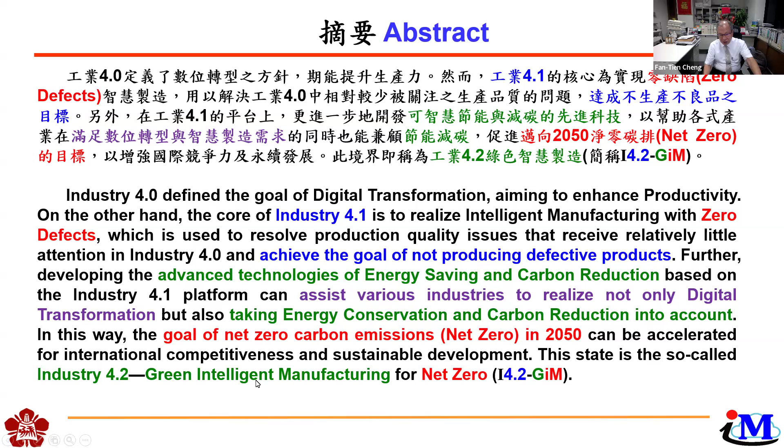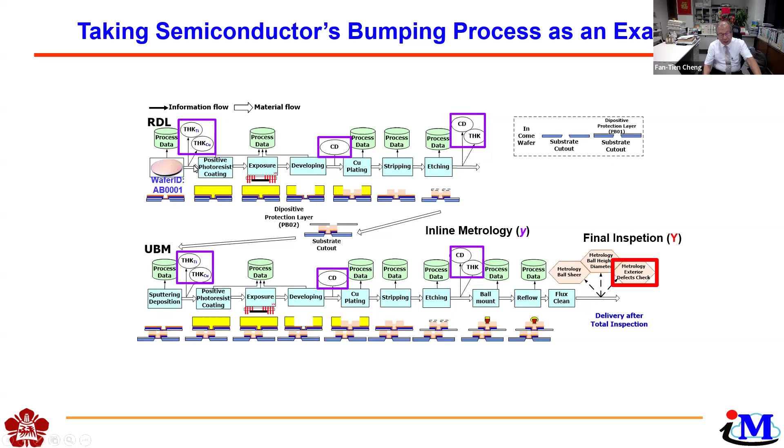Allow me to take the semiconductor bumping process as an example. To begin with, we need to collect all the big data. This includes the final inspection data, inline metrology data, the routing data, and finally all the manufacturing process data, that is from the FDC.

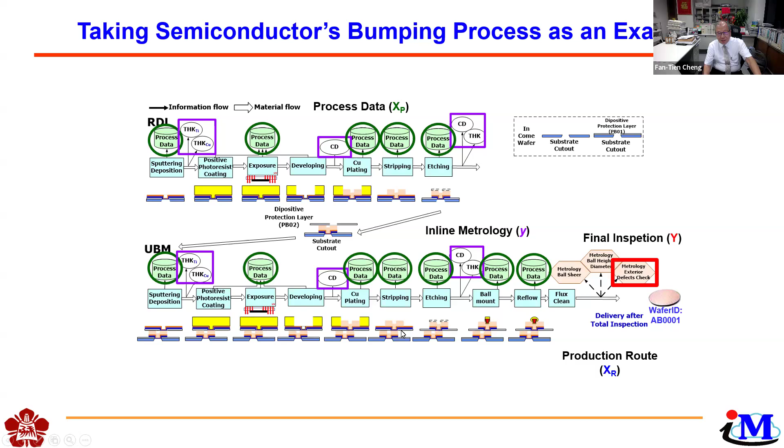Let me use the semiconductor bumping process as an example. After the production line big data is prepared, we need to install IoT devices, which I call CPAs, to collect not only the process data, but also metrology data and inspection data.

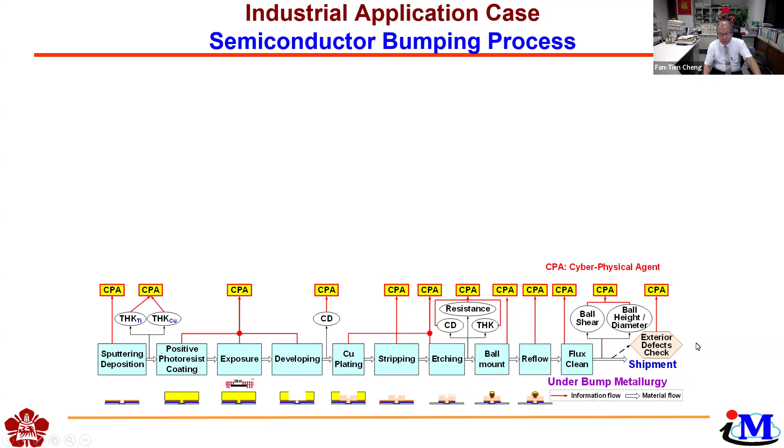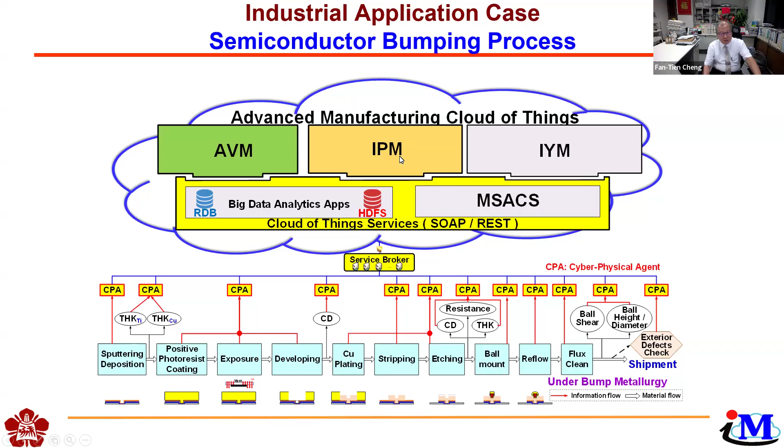After collecting all the big data, we transfer it into the cloud. We need to build a cloud here, based on the Advanced Manufacturing Cloud of Things framework. With this framework, we can install various intelligent services, such as automatic virtual metrology (AVM), intelligent predictive maintenance (IPM), and intelligent yield management (IYM).

Allow me to tell you the importance of product quality and the implementation of Industry 4.1. Let me use a video to show the importance of Industry 4.1.

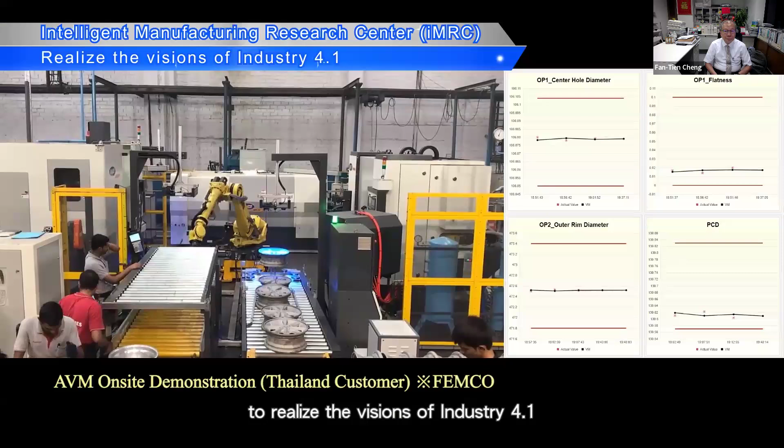Professor Fan-Tien Cheng and team at the Institute of Manufacturing Information and Systems of NCKU established iMRC in early 2018 to align with the Higher Education Sprout Project from the Ministry of Education. The mission of iMRC is to assist various manufacturing industries to realize the visions of Industry 4.1 and to achieve the goal of nearly zero defects of all products.

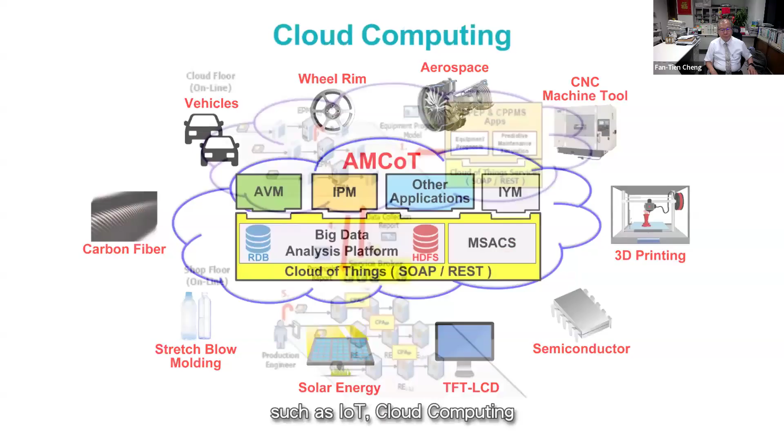Despite achieving the four core technologies of Industry 4.0, such as IoT, cloud computing, cyber physical systems, and big data analytics, I am able to use AVM technology to make all manufactured products undergo total inspection, not just to care about the health status of the equipment. What we need to care about is whether the product itself is defective or not. If we can find out the defective product, we will reject it, therefore all deliverables are without defect. So the mission of iMRC is not only to exceed Industry 4.0, but also to achieve the goal of zero defects.

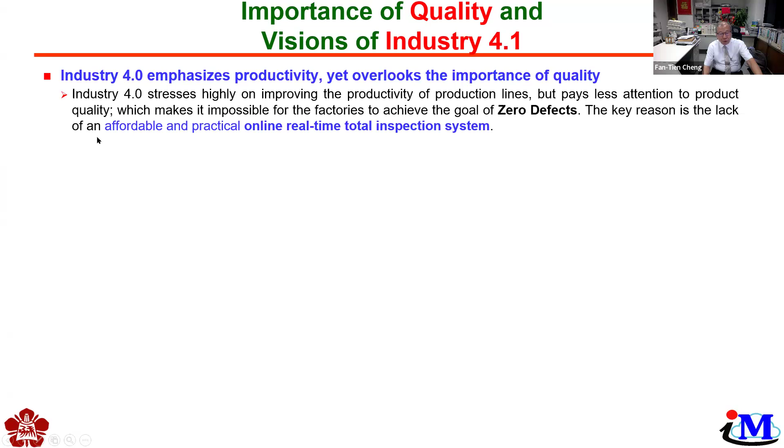Now the importance of quality and the visions of Industry 4.1. Industry 4.0 emphasizes productivity, yet overlooks the importance of quality. Why? The key reason is the lack of an affordable and practical online real-time total inspection system.

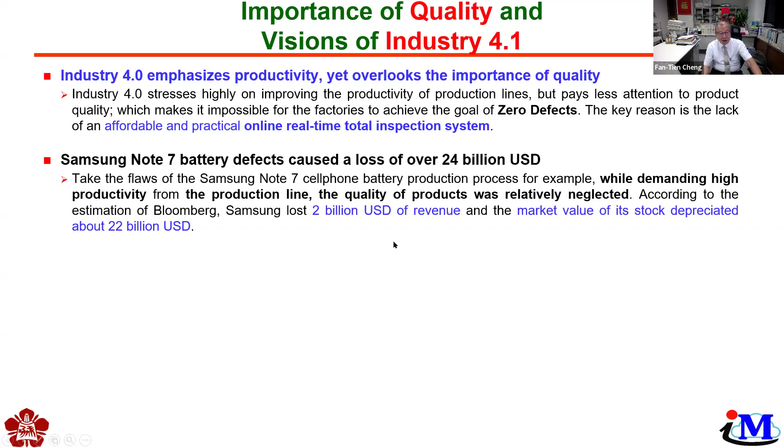For example, Samsung Note 7 battery defects caused a loss of over 24 billion US dollars. What the customer really cares about is that what they purchase has no defect. If there is a defect, they need to get it fixed or exchanged. Then it's no good.

For example, for the automobile industry, what they emphasize is zero defect manufacturing. In order to address these zero defect issues, we need zero defects production, and that is the vision of Industry 4.1. In other words, it's important not to overlook product quality while pursuing productivity.

So by integrating the intelligent services such as AVM, IPM, and IYM into the advanced manufacturing cloud of things platform, the goal of zero defects can be achieved. And this is the so-called Industry 4.1.

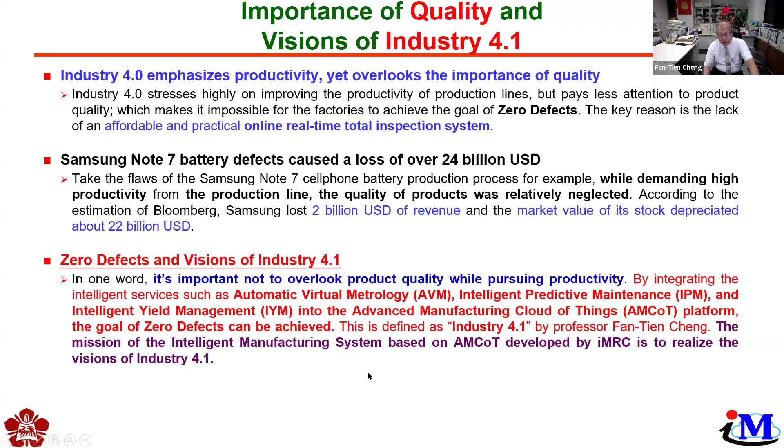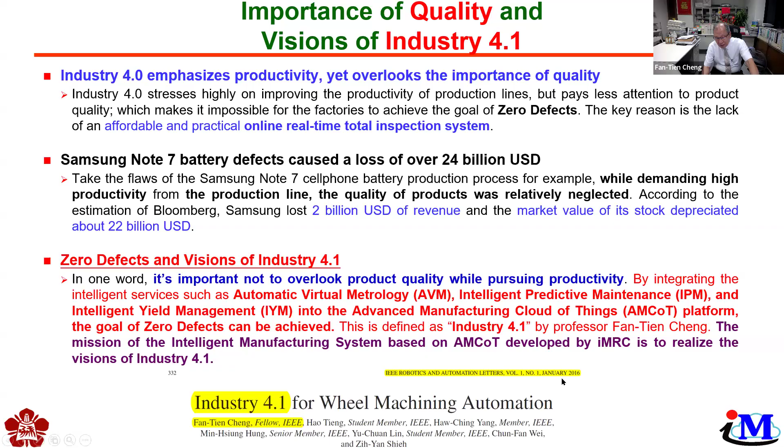In fact, the concept of Industry 4.1 for zero defect manufacturing was published in IEEE RA-L in 2016. So in order to implement Industry 4.1, I need to develop the so-called intelligent factory automation system platform. In order to achieve the above mentioned goals, it's necessary to create this. This is a total solution for intelligent factories.

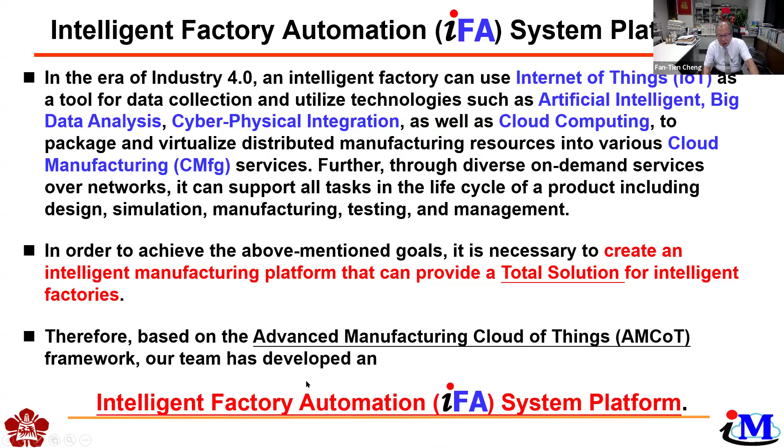So based on the advanced manufacturing cloud of things framework, our team has developed an intelligent factory automation, the IFA system platform. In applying this IFA for Industry 4.1 to achieve zero defects, the enabling device is an IoT device called CPA.

The CPA should have the functions of data collection with the equipment drivers, which will have interface communications such as OPC UA and SECS/GEM. And of course, it should have edge computing capability with the pluggable application modules, and it provides the functions of synchronizing with cloud services with this communication module.

So with these CPAs, we can connect the shop floor. The digital transformation: connect the shop floor and send the data into the servers that install AVM, IPM, and IYM, and it will interface with the MES and ERP. So this is the IFA platform.

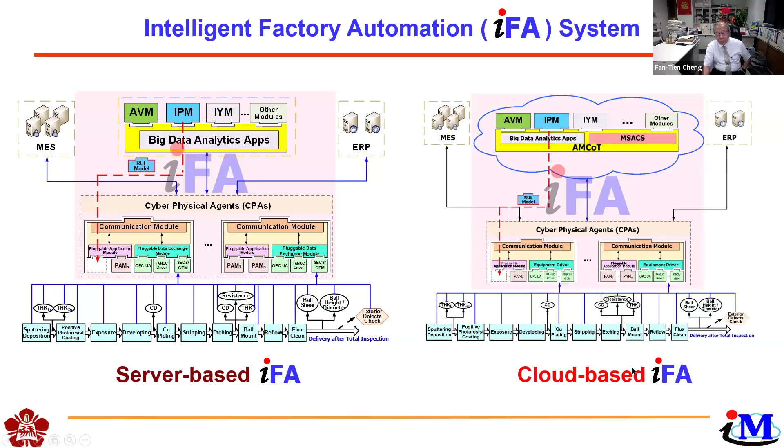So for Industry 4.0, we will have cloud computing or cloud manufacturing services. Then in this version, the cloud-based IFA, I just put these servers into the cloud. So this is the concept of the IFA platform. Now, an introduction to cloud-based IFA, and I'll use the video to show how the IFA operates.

By integrating technologies such as cyber physical agents, CPA, advanced manufacturing cloud of things, AMCoT, automatic virtual metrology, AVM, intelligent predictive maintenance, IPM, and intelligent yield management, IYM, iMRC developed the Intelligent Factory Automation, IFA system, as the core to upgrade Industry 4.0 to Industry 4.1 for realizing the goal of zero defects of all products.

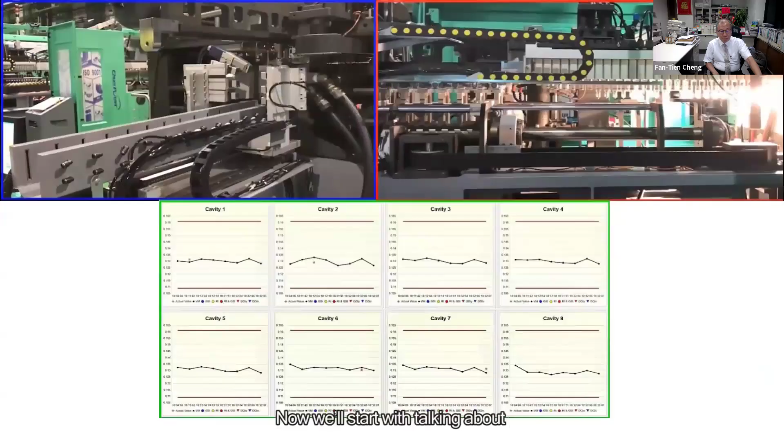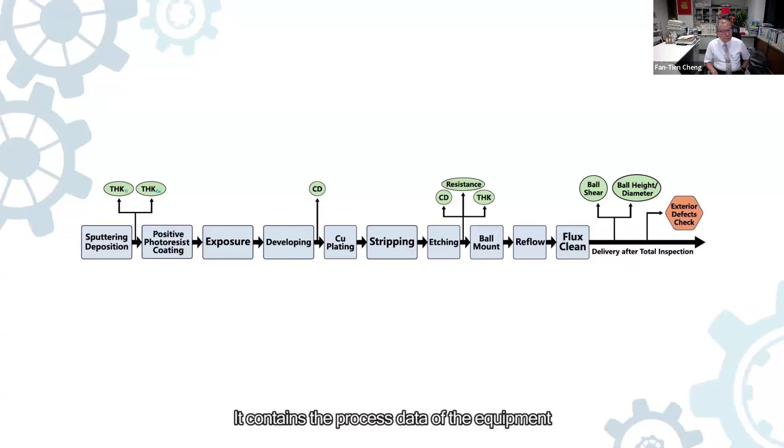Now we'll start talking about the operation flow of the cloud-based IFA system. Let's take a semiconductor factory which is ready to implement IFA, for example. Here we can see the manufacturing process of it. It contains the process data of the equipment during production and metrology data during inspection. On the left, we have the existing MES system and the ERP system on the right. The block marked with background color is our IFA system. All the components contained in IFA will be described as follows.

First, we have to install CPA. It will collect process data, metrology data, and other data from the ERP and MES systems and upload them onto the IoT application platform, which is supported by Chunghwa Telecom. As CPA is a significant part of the whole system framework, we'll talk more about it.

CPA is a cyber physical integration agent component based on the technologies of Internet of Things, IoT. It is in charge of collecting the data of different machineries. CPA is equipped with different equipment drivers for various industries, such as SECS/GEM and Interface A for the semiconductor industry, OPC UA and MTConnect for the machine tool industry, etc., and communication services for connecting to the internet and the cloud. Various intelligence services can be implemented as pluggable application modules and plugged into CPA for edge computing.

Based on the IoT application platform, we construct our AMCoT, which includes big data analytics apps and the manufacturing services automated construction scheme, MSACS. Next, we'll explain the core intelligence services in the AMCoT framework. The first one is automatic virtual metrology, AVM. The main function of AVM is to convert offline sampling inspection with metrology delay into online and real-time total inspection of all the work pieces.

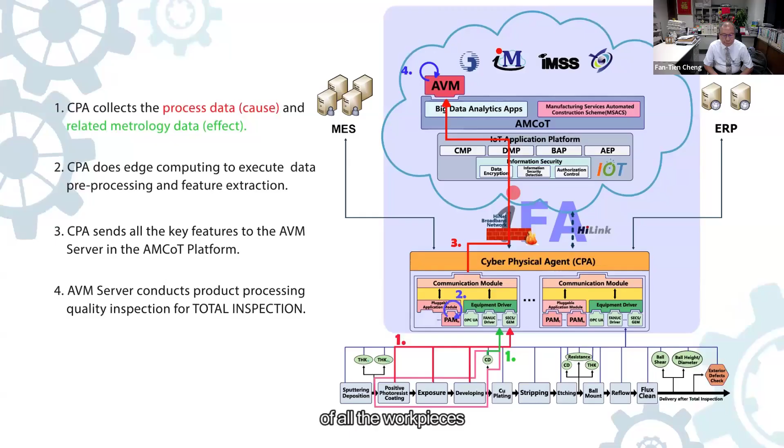The next service we'll introduce is IPM. IPM can monitor the health status of a key device and predict its remaining useful life, RUL, of the device. With IPM, we can improve the tool availability and prevent unscheduled downtime. Take a device in the sputtering deposition tool, for example.

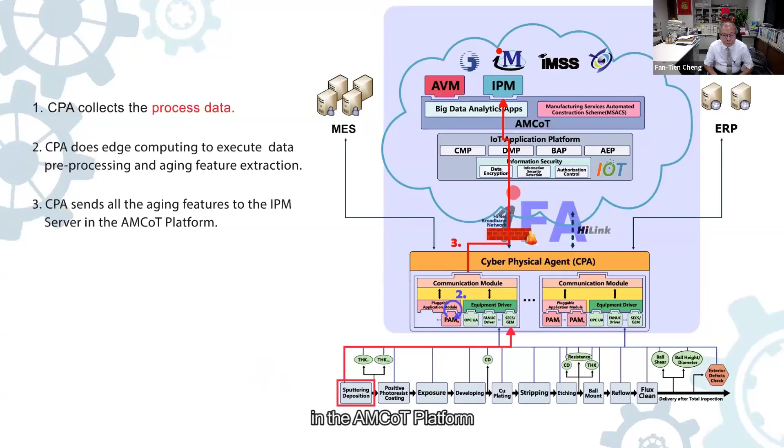The process data of the device are collected via CPA for data pre-processing and aging feature extraction of the key device. Then all the aging features are sent to the IPM server in the AMCOT platform. The IPM system then creates the RUL predictive model. After that, the RUL model is downloaded to the CPA. Finally, the CPA can conduct edge computing for RUL prediction of the key device.

Let's move on to IYM. The IYM server can reduce the searching times of locating the key station, device, and parameter, which affect the yield, from 8 to 24 hours to less than an hour, helping the engineers to quickly find the root causes that affect the yield and fix them. As such, and with continuous improvement, the goal of nearly zero defects of all products can be achieved.

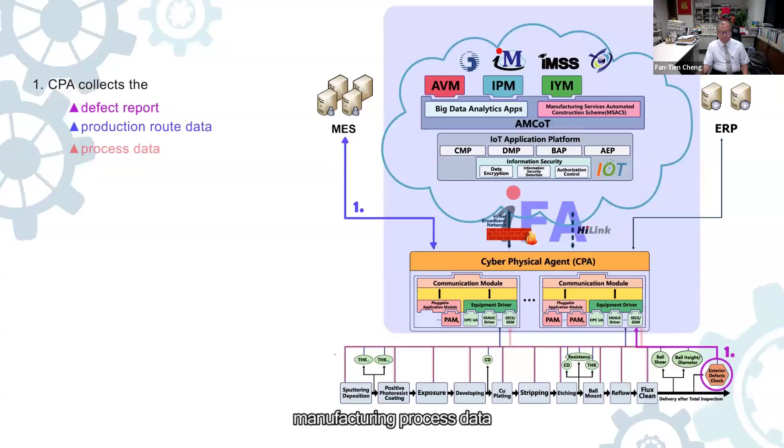Here's how the IYM server operates. First, CPA collects the final inspection data in the defect report, production route data, manufacturing process data, and inline metrology data for data pre-processing and feature extraction. Then, the key features of all the data are sent to the IYM server in the AMCOT platform. Finally, the IYM server can search for the root causes of the defects efficiently.

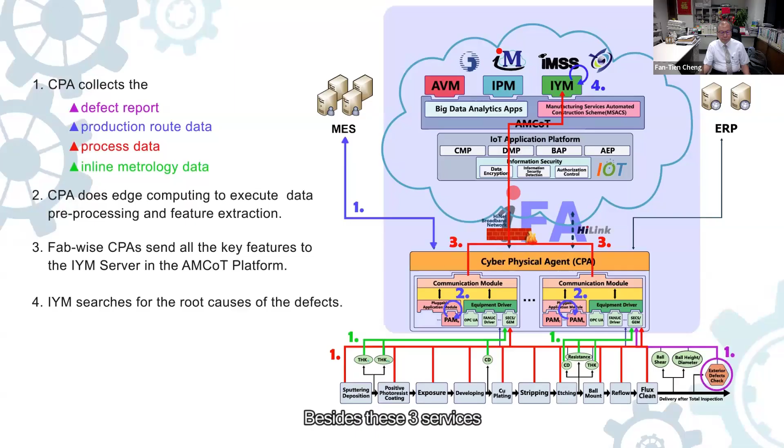Besides these three services, there are also other intelligence services in the IFA system. The AMCOT platform is designed for pluggable applications. By the same token, we can deploy other intelligence services on demand with the same pattern. So this shows how the IFA operates in the cloud-based system.

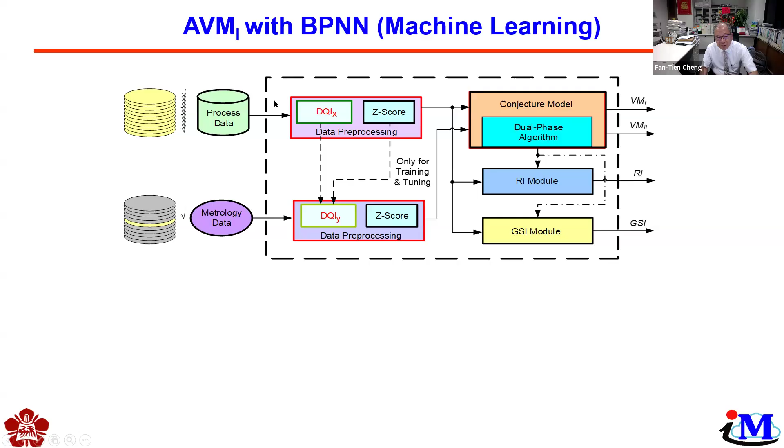Okay, so I should say the major intelligence service is AVM. Then I will explain the function of AVM. So for AVM, we need to collect all the process data and just a piece of the metrology data, which is for training and tuning purposes only. Then the main purpose of AVM is just to convert the process data into the virtual metrology value, right?

Then not only are the VM values produced, but also the AVM system generates the accompanying reliance index of each phase 1 VM value and phase 2 VM value. Users can check the reliability of the VM prediction via its corresponding RI value. Then promptness and accuracy can both be taken into consideration in the dual-phase algorithm. Phase 1 emphasizes promptness, and phase 2 improves the accuracy.

Besides that, we can take care of the data quality issues. The AVM system can ensure the quality of process data and actual metrology data online and in real time. Thus, the quality of the outputted VM values can be further assured. This has all been documented in IEEE Transactions on Automation Science and Engineering in 2012.

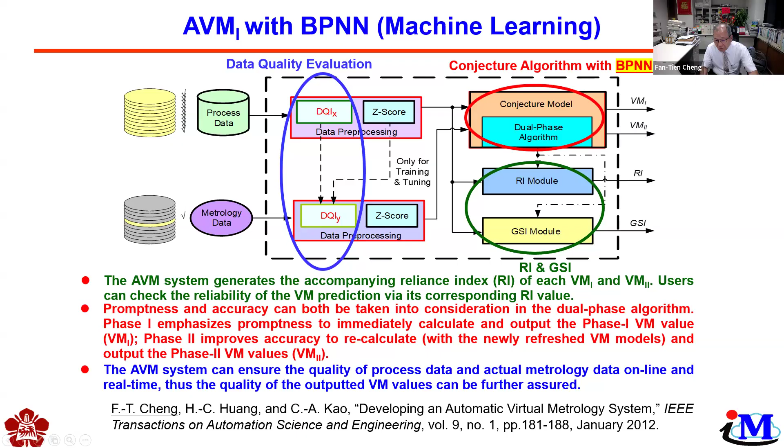Allow me to use this video to show you the AVM demo for critical dimension of the photo process that was installed in ASE. That is a packaging company in Taiwan. This video takes the bumping process, for example. The virtual metrology Y is the CD value after the photo process. As such, lithography process data need to be added in to establish the cause and effect relationship for CD value prediction.

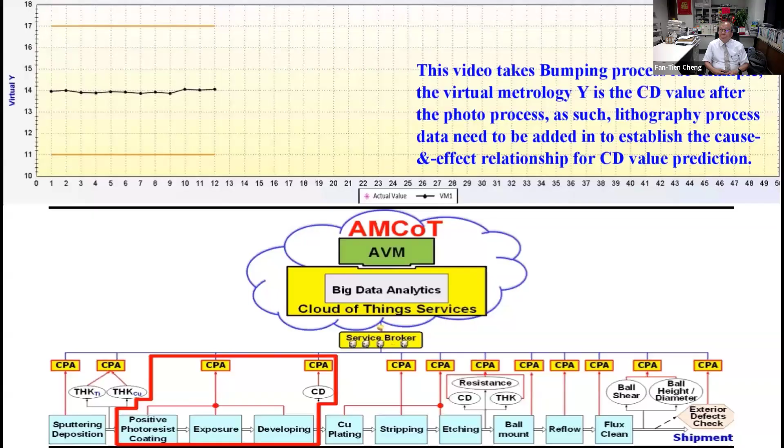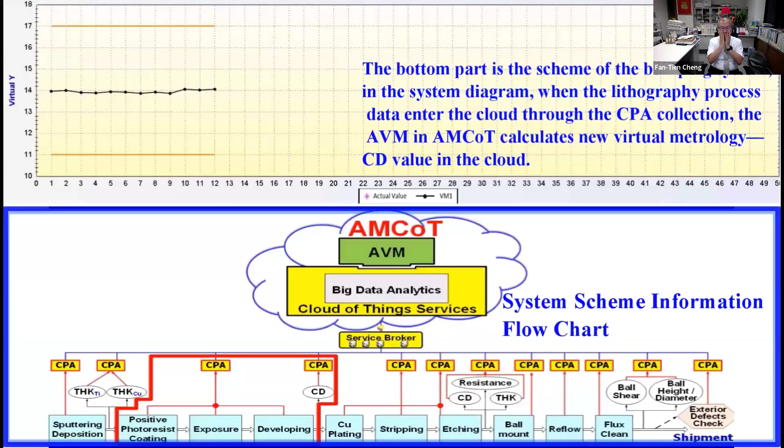The upper part displays the actual AVM conjecture scenario, with the black lines being the BPNN prediction values. The bottom part is the scheme of the bumping system. In the system diagram, when the lithography process data enter the cloud through the CPA collection, the AVM in AMCOT calculates the new virtual metrology CD value in the cloud. As data keep entering AMCOT for AVM conjecturing, delayed sampling inspection can be turned into real-time total inspection.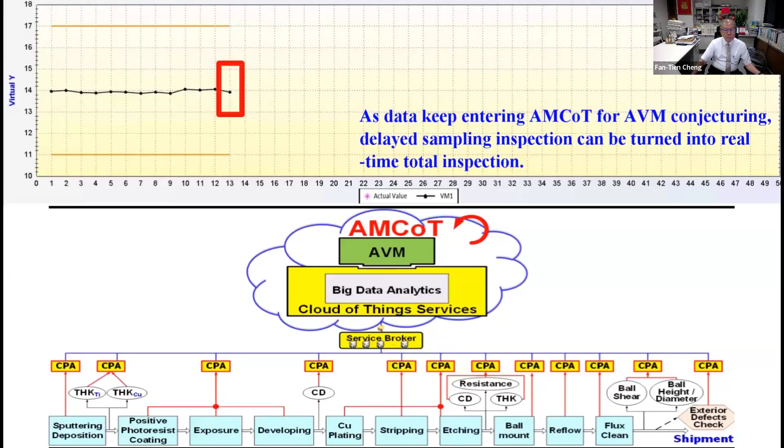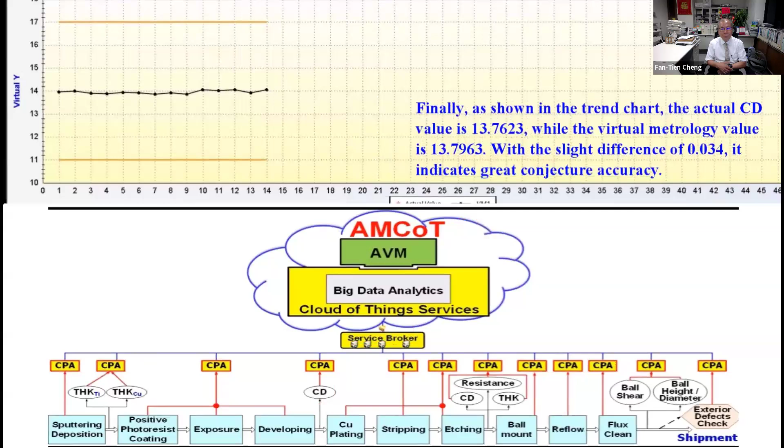After actual CD metrology, the values will be uploaded into the AVM of AMCoT through CPA for model tuning to ensure the freshness and accuracy of the model. Finally, as shown in the chart, the actual CD value is 13.7623, while the virtual metrology value is 13.7963. With a slight difference of 0.034, it indicates great conjecture accuracy.

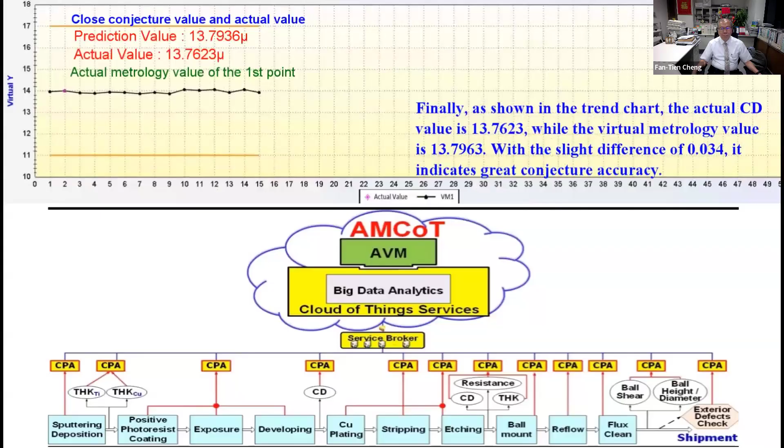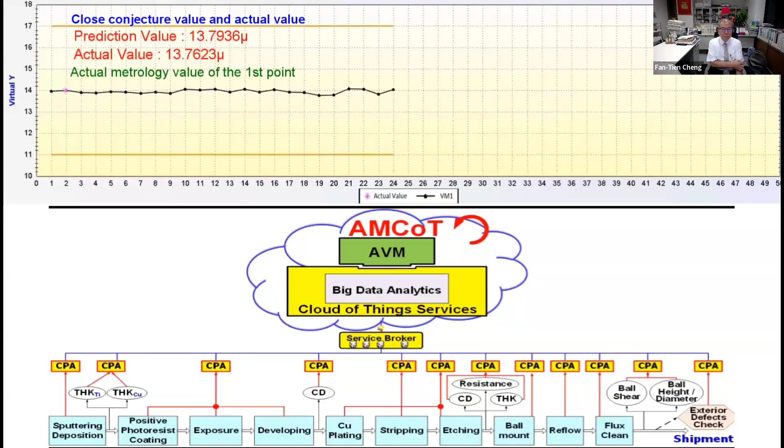Similarly, during the second actual sample inspection, Y data is uploaded into AMCoT for model refreshing. The actual value is 13.8146, while the virtual metrology value is 13.8278. The difference is within the error tolerance, meaning excellent conjecture accuracy.

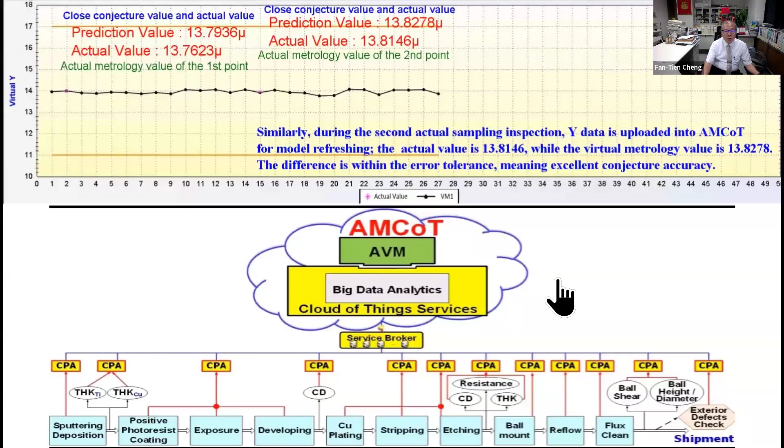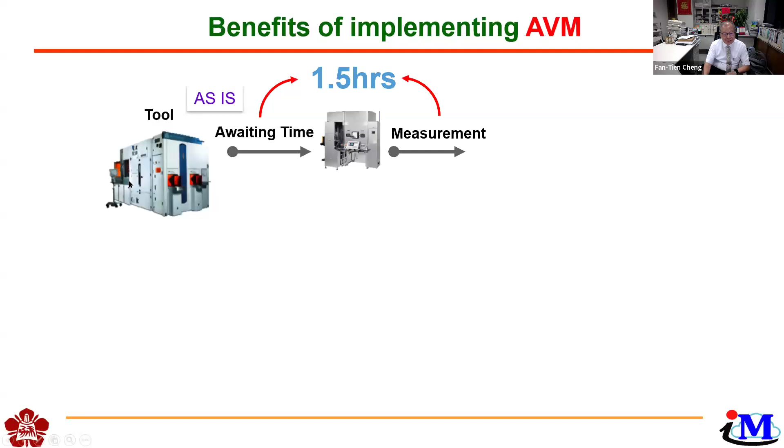So then what are the benefits of implementing AVM? As is, after the tool finishes the processing, if we'd like to know the yield of that, we need to measure the product. It takes about 1.5 hours. And that is the reason why only sampling inspection is conducted. You cannot measure all of them because it takes so much time.

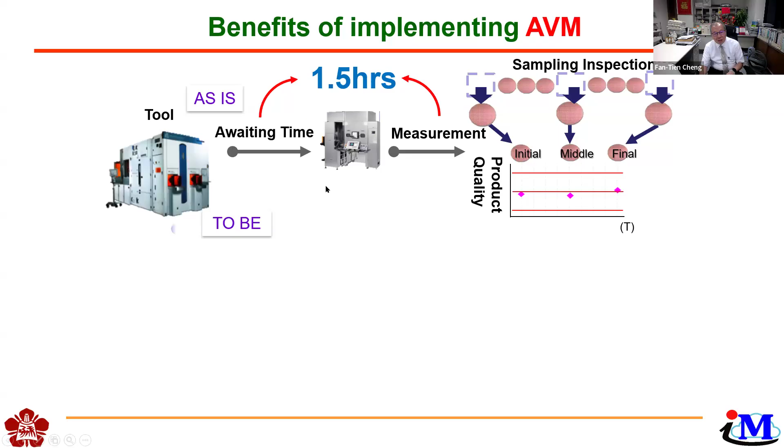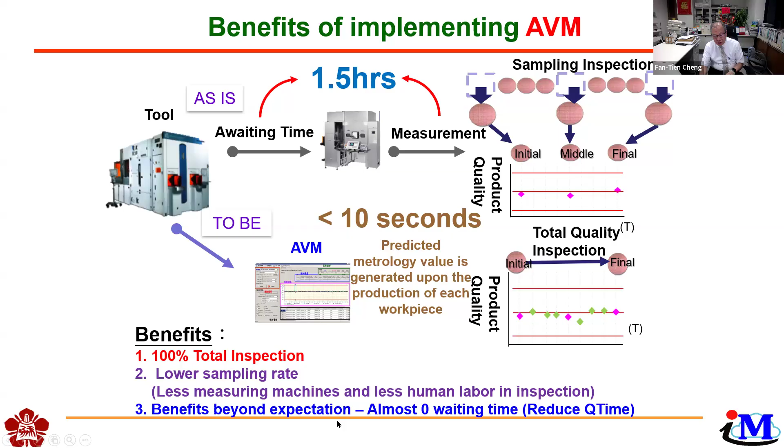And then we can lower the sampling rate. That means fewer measuring machines and less human labor in inspection. And the benefit beyond expectation is almost zero waiting time. That is, we can reduce the queue time.

Okay, so the purpose of this is to integrate the function of AVM with those of the MES. Why do we need to integrate AVM into the MES? The MES has functions of SPC, scheduling, order management, etc. But in order to use the SPC to check the quality or the yield of the production, you need to feed in all the measurement data. If you just give it the sampling inspection data, it can only give you sampling inspection SPC results. But if you would like total inspection results, how can we do it?

Then of course we can install AVM into the MES. The AVM will collect the process data and the metrology data and convert sampling inspection with metrology delay into real-time and online total inspection. With this total inspection data, the AVM value not only can be fed into the SPC for total inspection SPC, but also the phase one VM value can be fed back for run-to-run control, and the phase two VM value can be fed forward for feed-forward run-to-run control.

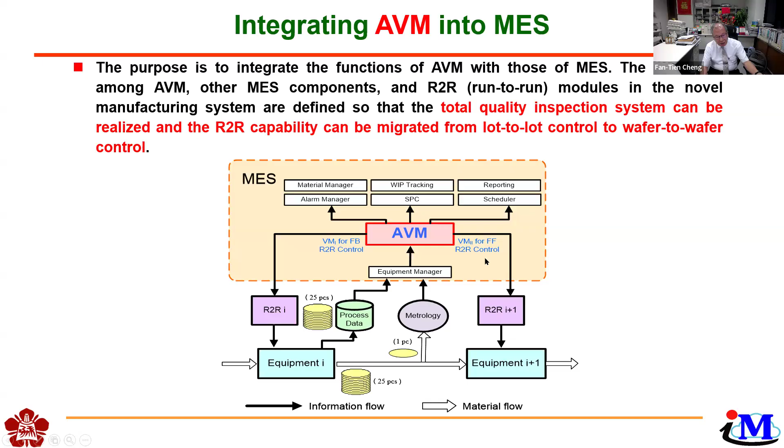Okay, so next one: the main features and benefits of IFA. The IFA can accomplish big data collection infrastructure for intelligent manufacturing using the CPA, the Internet of Things and edge computing. Then we can accomplish a cloud computing platform using the AMCoT platform with the technology of cloud manufacturing. Then establish information security monitoring with the IoT information security monitoring system.

Then improving the utilization rate of the factory and monitoring the overall equipment effectiveness, OEE, with EMS. And of course, we need to accomplish total quality inspection on all workpieces with AVM. And improving availability of production tools with IPM so that remaining useful life, RUL, prediction can be achieved to avoid unscheduled down. Then constructing the root cause identification infrastructure for yield loss with IYM for continuous improvement.

So all of the benefits and features can convert into achieving zero defects of all products for Industry 4.1. So the strategy to achieve Industry 4.1: in phase one, we will consider all deliverables first. It's very straightforward. If you would like to guarantee that there are no defects in the deliverables, how can we do it? Of course, you just use total inspection.

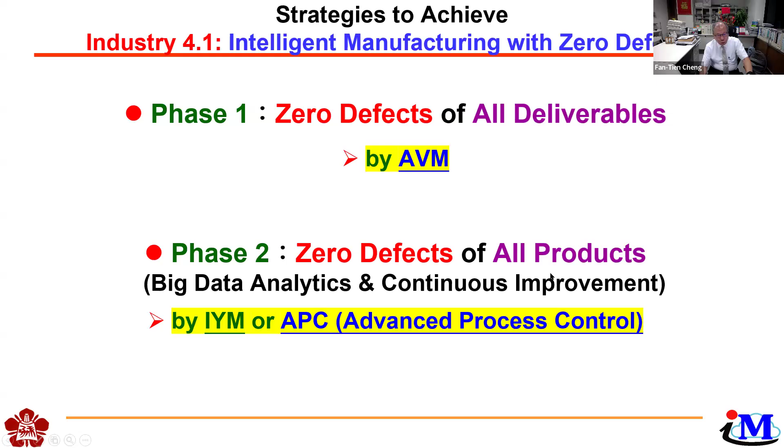So before it really exceeds the threshold, we will use the APC technology or run-to-run technology to bring it back. So this is one of the approaches to prevent the defects. So you see, by using these kinds of approaches, we can assure that all the products are approaching nearly zero defects.

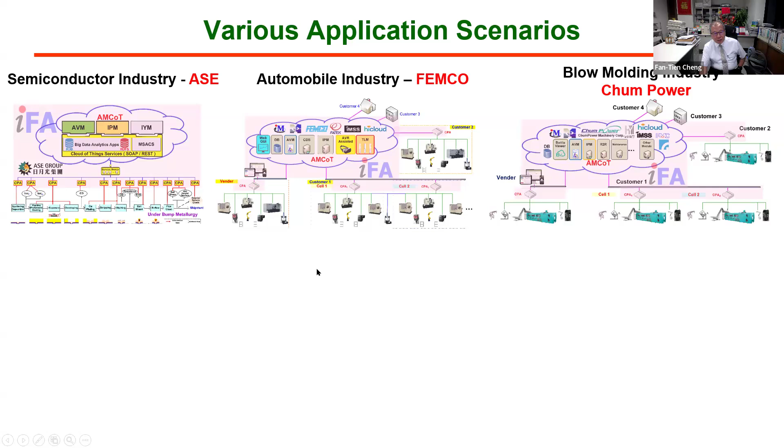Okay, so various application scenarios. What are the various application scenarios? I have already implemented the IFA in the semiconductor industry, for example, in ASE, to achieve the goal of Industry 4.1. And then the automobile industry, FEMCO, the blow molding industry, Chum Power, and the carbon fiber industry, that is Formosa Plastic. This is a roll-to-roll process, and I still can implement AVM on it. And then the aerospace industry, AIDC, the paper industry, CHP, and the chemical industry, Hopax.

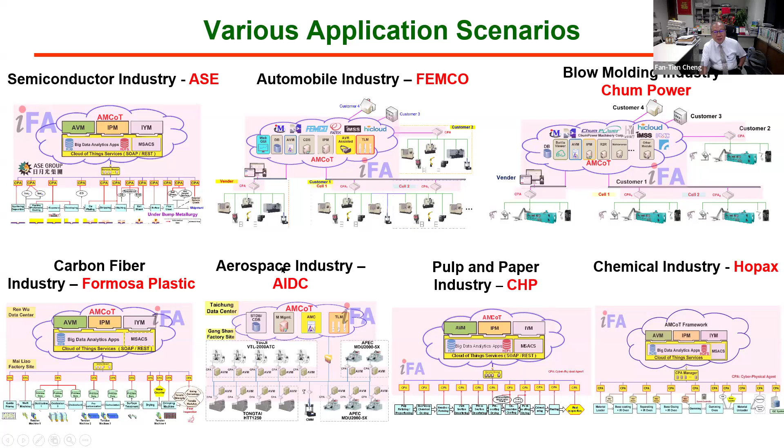Actually, these are only the typical ones. More examples are still being implemented in various industries. So my research team integrated all the core technologies of the innovative IFA systems platform and the various intelligent application modules such as AVM, IPM, IYM, etc., that have been developed successfully over the years, along with practical application cases, into an English textbook entitled Industry 4.1: Intelligent Manufacturing with Zero Defects. This is the one.

You see, the cover is the IFA picture. Okay, so this book was published by Wiley IEEE Press and released in October 2021. And then the Chinese version was released in January 2023. Both are in hardcover and ebook versions. Okay.

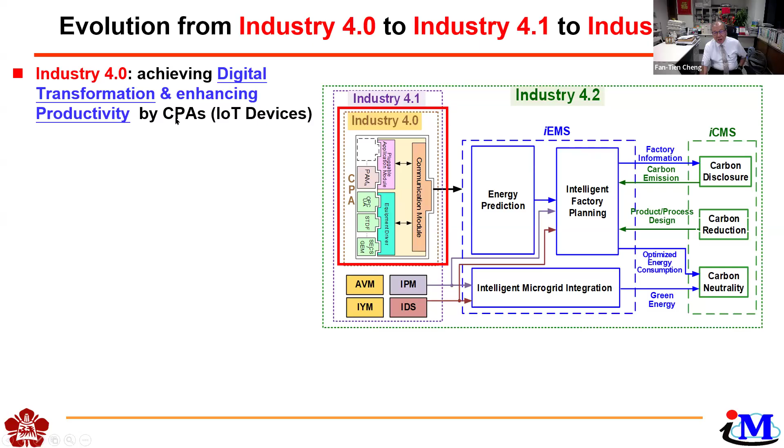So now I switch gears from Industry 4.1 to Industry 4.2. So the evolution from Industry 4.0 to 4.1 and to 4.2. Industry 4.0 mainly aims to achieve digital transformation and enhance productivity by implementing the CPA and the IoT devices here. Industry 4.1 is trying to accomplish zero defect manufacturing by AVM, IPM, IYM. This was documented in the textbook I just showed you.

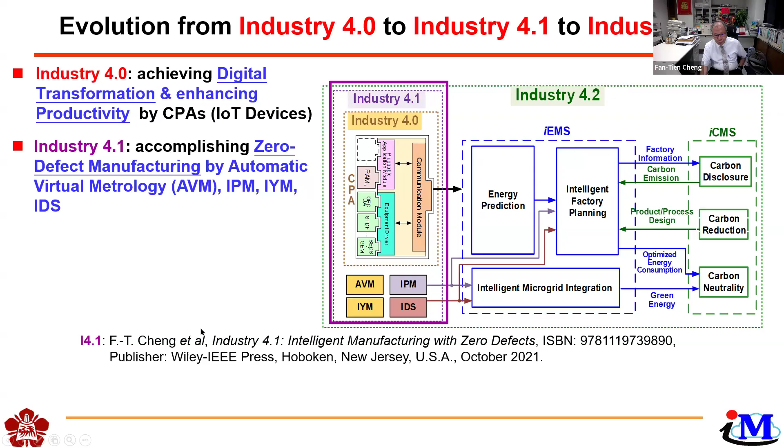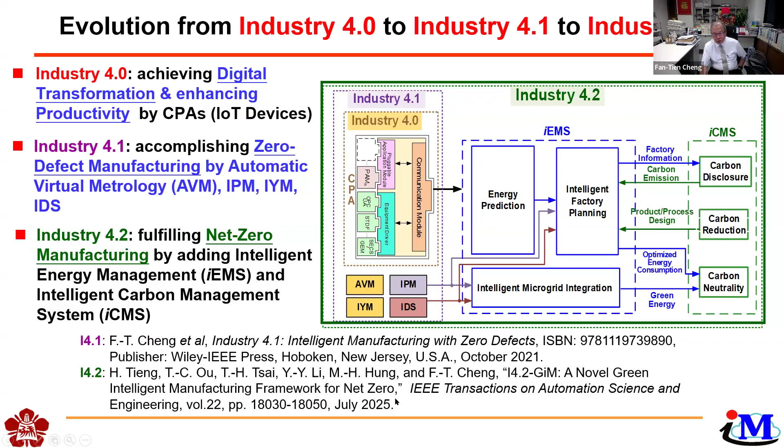Okay. Then we have moved one step further to Industry 4.2, fulfilling net zero manufacturing by adding intelligent energy management and intelligent carbon management. And this is actually an IEEE T-ASE journal paper just published 2 or 3 months ago. Okay, so now allow me to present green intelligent manufacturing for Industry 4.2 to achieve net zero.

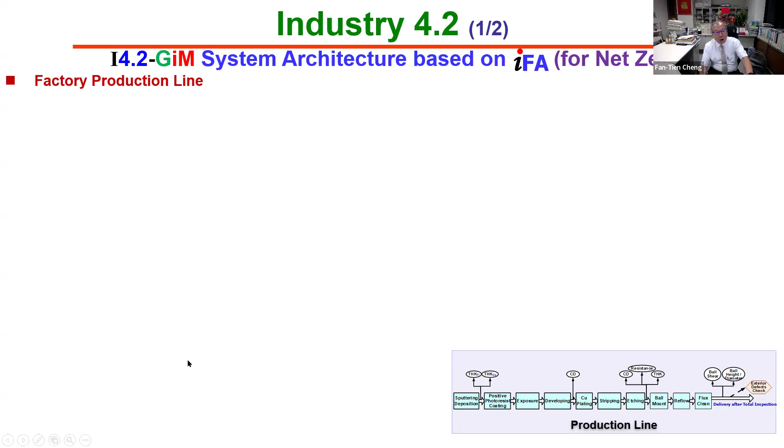So in order to achieve net zero, not only the factory production line, but also the factory facility systems need to be taken care of. So likewise, I developed an Industry 4.2 framework. Okay, this is the framework. The whole system will connect to the production lines and facilities. So this Industry 4.2 framework includes the ICT platform, the information and communication platform, which includes the blockchain, security protection, and containerization.

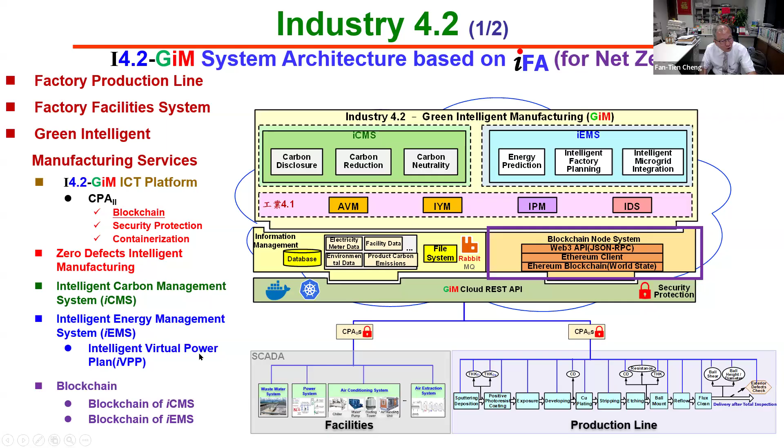Okay, and then of course, it not only considers energy management and carbon management, but the original zero defect manufacturing technology, the AVM, IYM, IPM in Industry 4.1, of course, can still be reserved here. So then we will develop the intelligent carbon management system and the intelligent energy management system. And of course, we can also implement the intelligent virtual power plant and the blockchain I just mentioned, for carbon and energy trading.

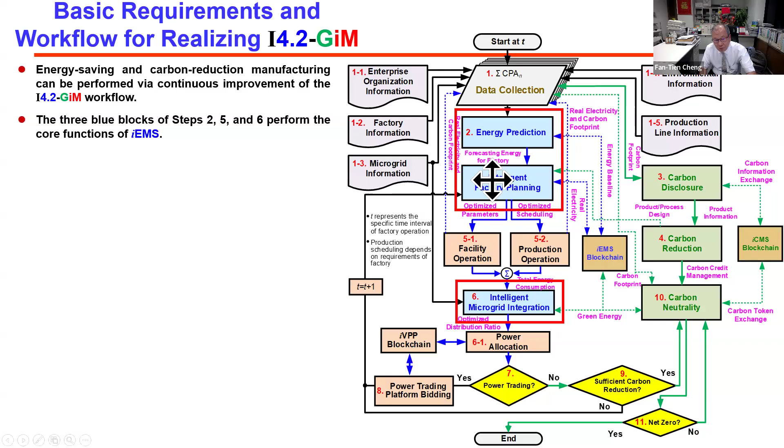Okay. So the basic requirements and workflow for realizing Industry 4.2. The first step, of course, is the same: using the CPAs to collect the big data. That is the big data collection. Then you see the 3 blue blocks of steps 2, 5, and 6 perform the core function of energy management. And the 3 green blocks of steps 3, 4, and 10 perform the core function of carbon management. And then steps 5-1, 5-2, and 6-1 perform manufacturing operations.

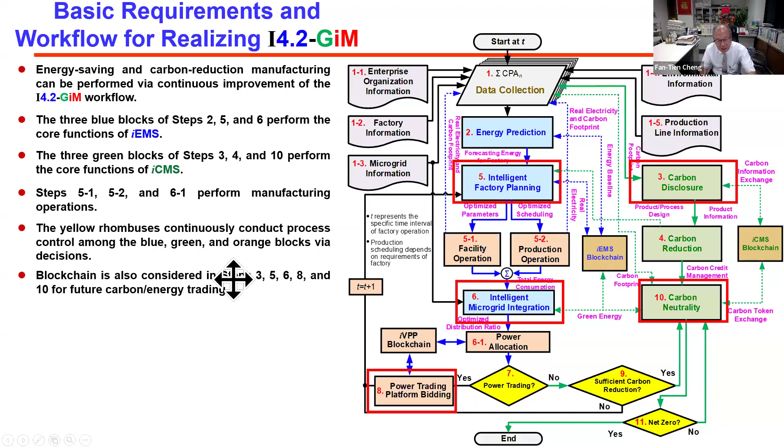And the yellow portion will continuously conduct process control among the blue, green, and orange blocks via decisions. The purpose of that is to check whether it reaches the goal of net zero or not. Then we will use the blockchain for further carbon and energy trading.

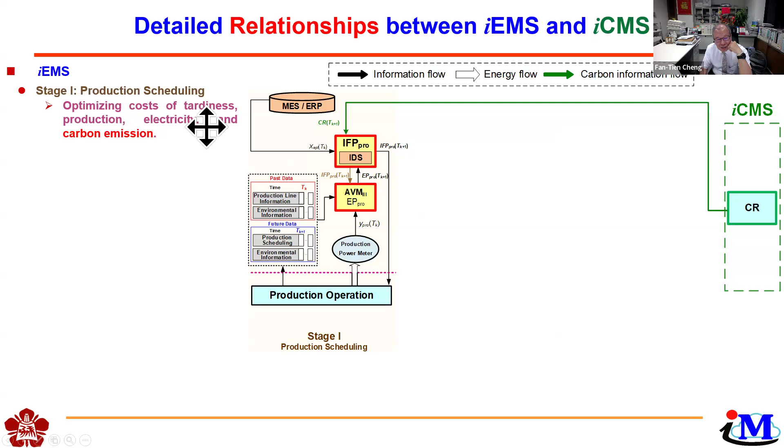So the detailed relationship between energy management and carbon management. You see stage 1 here, production scheduling tries to optimize the cost of tardiness, production, and electricity, and the carbon emission. And then stage 2 is for facility parameter control, trying to optimize the cost of electricity and the carbon emission.

Then stage 3, that is for microgrid allocation. So optimize the cost of electricity, equipment operation, charge discharge efficiency, and fuel and carbon emissions. And then the carbon management is trying to determine how much energy can be used or has to be used for carbon reduction and energy distribution. Please pay attention here.

The main key function here is what I call the third version, I should say third generation, of AVM, automatic virtual metrology, shown here. This is used to predict the energy baseline, to forecast the energy baseline. So we need to have the energy baseline forecasting so that energy saving and carbon reduction can be achieved more efficiently.

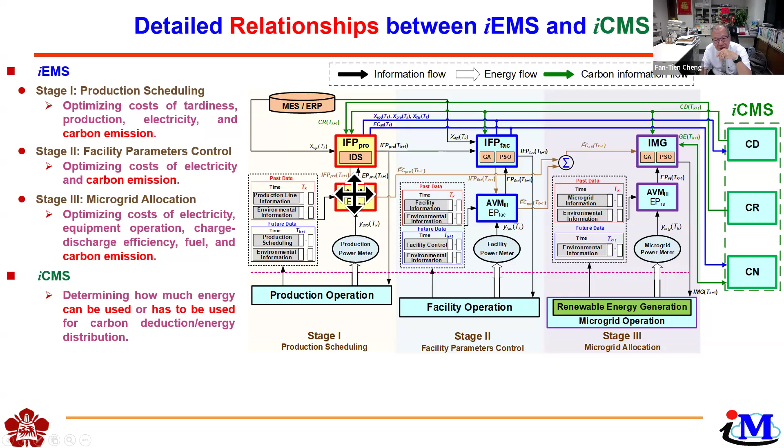So allow me to show you what is AVM3. You see the intelligent energy management, the core technology is energy forecasting. Energy forecasting is the foundation of all energy management activities.

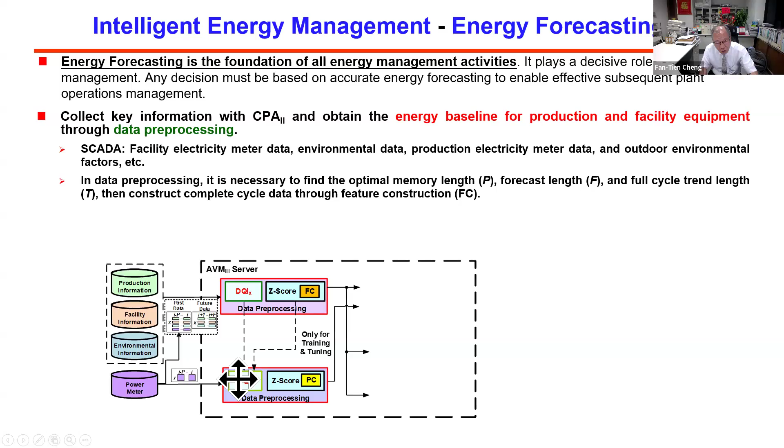To begin with, we need to collect all the big data from the production information, facility information, environment information, and the power meters, etc. Then after collecting that, we need to check the quality of that data. And then we need to find the optimum memory length P, forecast length F, and a full cycle trend length T, and then use the transformer model and the LSTM model to predict the energy baseline.

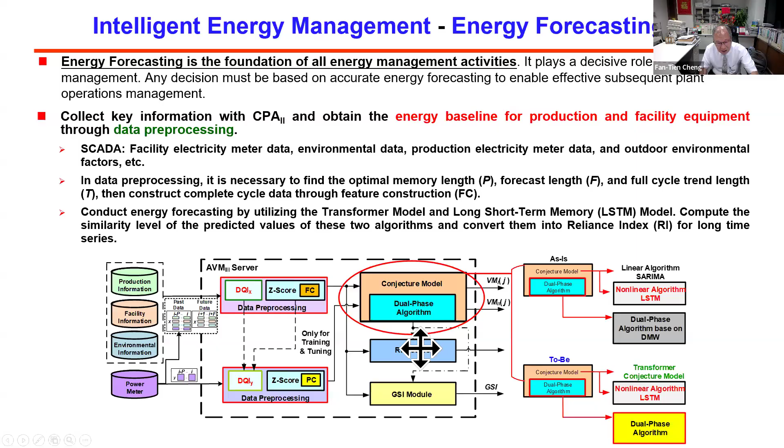So using the LSTM and the transformer to do so. This is the third generation AVM. Not only the prediction value, but also the reliance index is still in here, and we can check the data quality there. So with this AVM3, we can predict the energy.

We can forecast the energy, but here the predicted accuracy is no good, so then we will automatically ask it to refresh or retrain the model. And after retraining, the tracking accuracy comes back. So we do have the capability to do energy baseline forecasting.

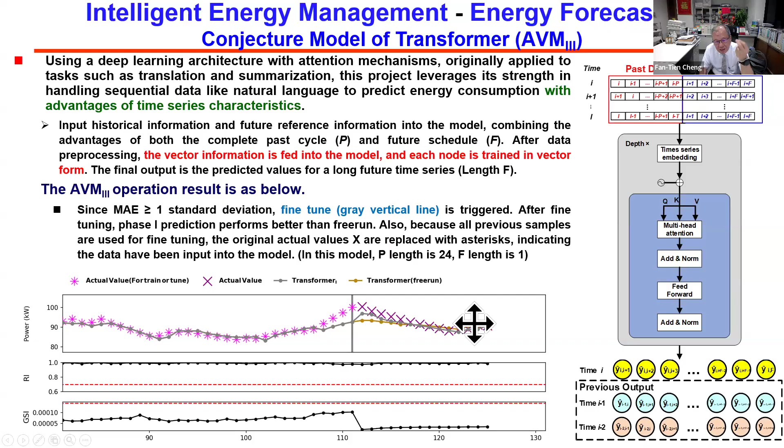And with this technology, we can include it here. Using the energy baseline forecasting, then using this predicted electricity load combined with the product information to do production line scheduling, so that we can save the energy by this kind of scheduling, and distribute the power more efficiently.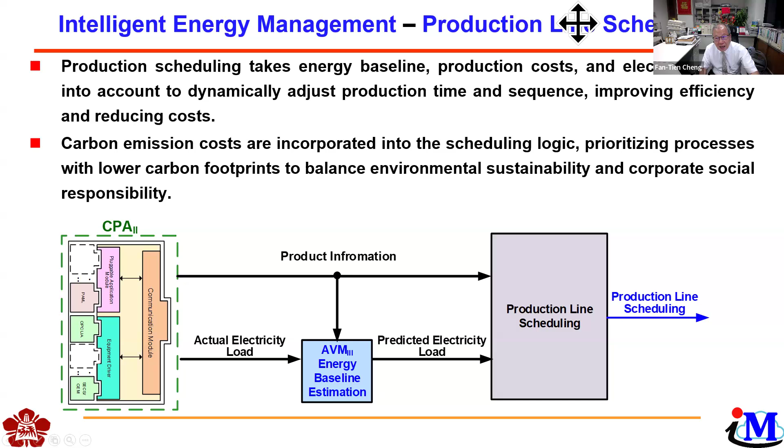Not only in the production line scheduling, but also in the intelligent facility, the AVM3 energy baseline estimation is put in here. This is a key function, so with this predicted electricity load, intelligent facility management can be achieved more efficiently.

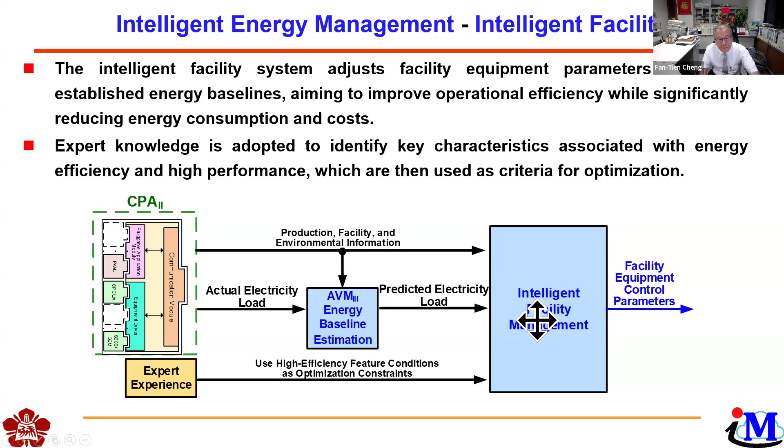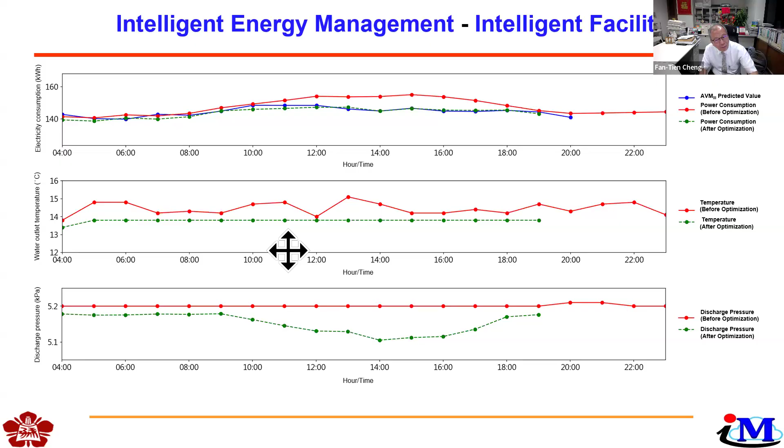With this kind of technology, we can have more efficient energy reduction and carbon reduction. Energy conservation and carbon reduction. Okay, then the next one.

For example, in Taiwan, Formosa industry has 4 sites. Each site can not only implement Industry 4.2, but also the virtual power plant. And we can use the blockchain to connect them with one another, so they can trade the energy with one another. If they have more energy, they can sell it back to the Taiwan Power Company, etc. So this is the concept of Industry 4.2.